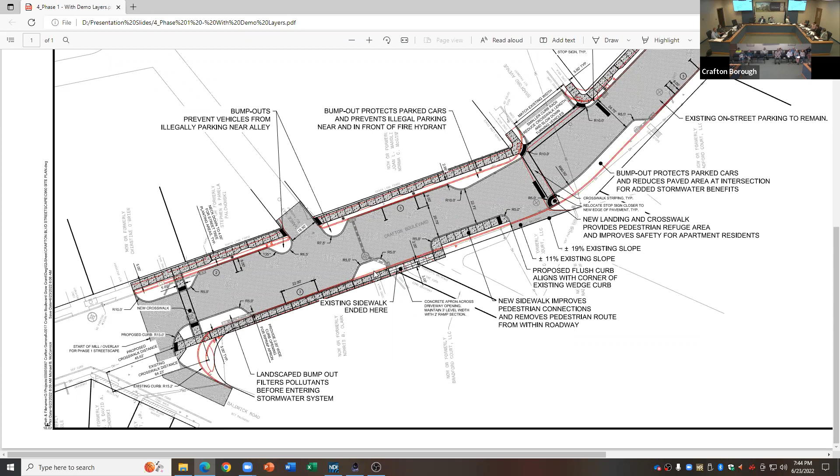Let's go to the bottom left of the drawing, and you'll see that is Baldwick Road, which comes out and intersects with Crafton Boulevard. If you look at the red lines, those are all the existing curbs, so you can see where the curb used to be. You can see that on the drawing as well. Can you zoom in a bit more, right at the intersection of Baldwick and Crafton Boulevard? Let's take a look at a couple things.

Look at the red line versus, if you can scroll, the new curb lines. If you see that thin double line, that represents the curb. You see it's marked proposed curb, R15—that's the new curb. Now look at the crosswalk, look where it says new crosswalk, and look at the distance between the old curbs and the new curbs. There's significantly less walking distance for the pedestrian to cross that street.

Can you show that? I'm looking up on Crafton Boulevard right there. You see that white area—those are the bump outs. In between those two black bars is where a pedestrian would cross. If you look at where the red is, see how far back the red lines are—you had an extended exposure crossing that street. So that's just one safety improvement for every pedestrian walking there. And if you look on Baldwick, it's also reduced its crossing distance by 20 feet.

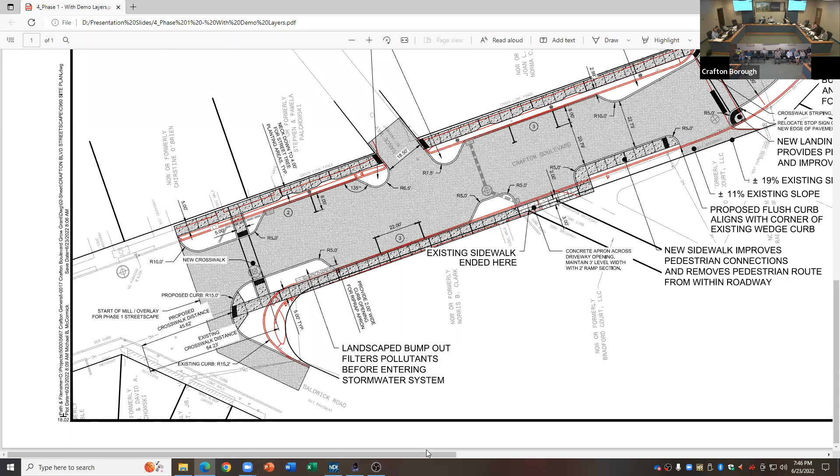We'll get into the turning radiuses in a minute. Next, if you go across the street on Crafton Boulevard, you see the bump outs—they're white right there—and then go west, right across from Baldwick. That's where the fire truck or any vehicle would be turning out, and where these bump outs are is where illegal parking would otherwise be.

So imagine, and when you see the turning radius that will show, if you're coming out driving a truck, whether it's emergency or not, and cars are tightly parked right where those bump outs are, that makes it very difficult to maneuver. And that happens.

We even took a snapshot showing when there were two illegally parked cars in a spot where someone might say, oh, that never happens, people obey the laws here, they won't park at the corner. We're saying that's not true, it will happen. So whether there's a bump out there or a car parked there, the bump out is far superior to the car parked.

Once again, you can't drive over a car with a truck. But on occasion, if the driver misses the swing or doesn't want to back up, he can hump the curb. So we see that as a win for the fire company as well as the pedestrians.

So the rest here is just showing you the red lines, which indicate that the curbs, other than the bump out areas, really haven't changed. The width of the road is essentially the same, except where we squeeze the road for traffic calming, slowing traffic, making safety better for the residents and the pedestrians.

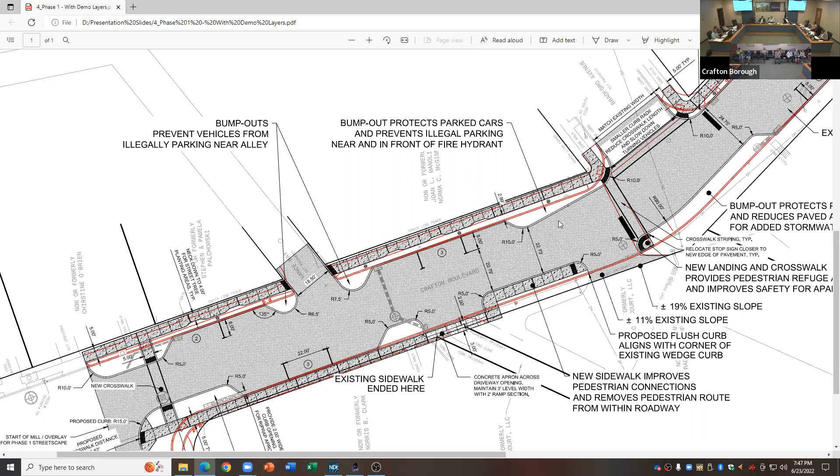So one other thing to look at, the mayor mentioned this. If you go up to the entrance to the apartments you see that marked R5, pointing to that curved radius, the other one there. That is depressed, so when a truck or any large vehicle that doesn't think it can make that turn, it can and probably will run over that depressed curb.

Once again, making it available to turn in. Now you see where the old curb line was, where the red line is. So you might say, wow, there's a huge area that you're taking away for vehicles to turn in. But essentially, as the vehicle moves over, it's over 3 or 4 feet for the sidewalk, but when it turns, it can cut that corner on the sidewalk. So we'll show it in the turning radius maps. It is very maneuverable, in fact almost identical to before the sidewalk was installed.

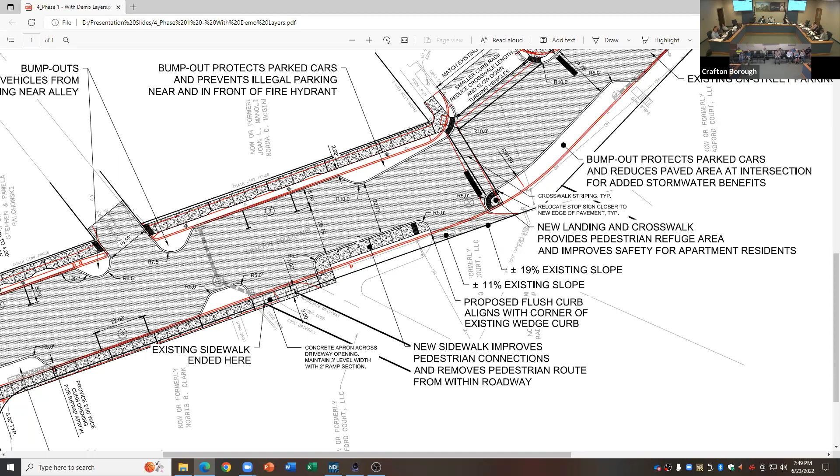So those are some of the features I just wanted to show on the intersection in question, and I wanted to hit some of the highlights. You feel free to take these and look at them. I did want to show you that the red lines indicate there is not an overall reduction in the roadway width.

Pardon me? Yes, good point. So this is the first phase of the streetscape. The next phase runs from Dinsmore to Clearview. Okay, the reason for mentioning that is we took this same design and we moved it into the next phase of streetscape and submitted it to PennDOT.

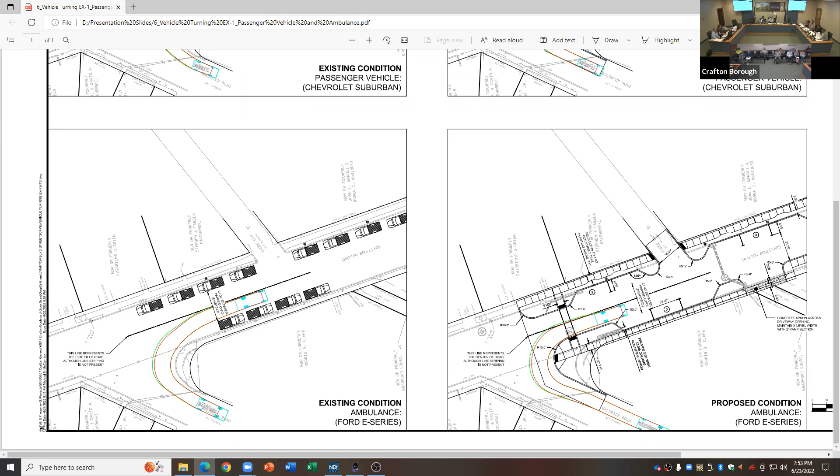Next is the fire truck, and the model was run on a 40-foot fire truck. This is actually a little larger than Crafton's, but it may be similar to the Green Tree truck. So this one's a little different. You can see that the old turn, the front of the vehicle - I'm sorry, I should have said that the green line represents the vehicle body, and the red lines represent the tires. So when you see the green line, that's where the body swings out as the tires are turning.

But in this case, you can see there was a slight entry into the opposing lane for the truck, and now there is a significant entry into the lane for the truck.

But I'd argue that flashers and sirens and trucks and emergency vehicles going through red lights and not obeying the street laws is typical. So once again, this turn would have to be maneuvered expertly by a driver, with the lights, and when it's safe. So this maneuver, we would think, would not happen

in an infinitesimal amount compared to all of the traffic that does pass through here. So if you compare the number of times that the ladder truck will make this maneuver and compare that to the number of times that every other vehicle that uses this road makes that maneuver, it is a massive difference.

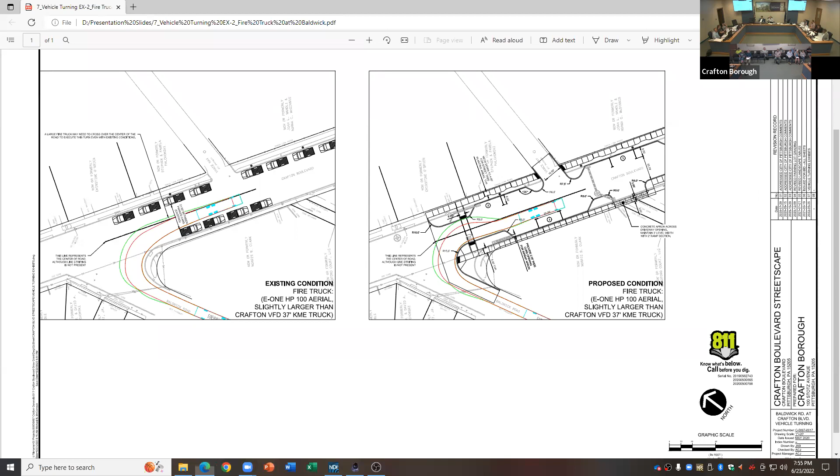So once again, if you look above, you see the red, and this is for the ladder truck. You see the red tires coming in, making the left, and the difference here is as he swings out, we're showing that the tires do not go over the depressed curb. But if they did, that would obviously bring that vehicle in.

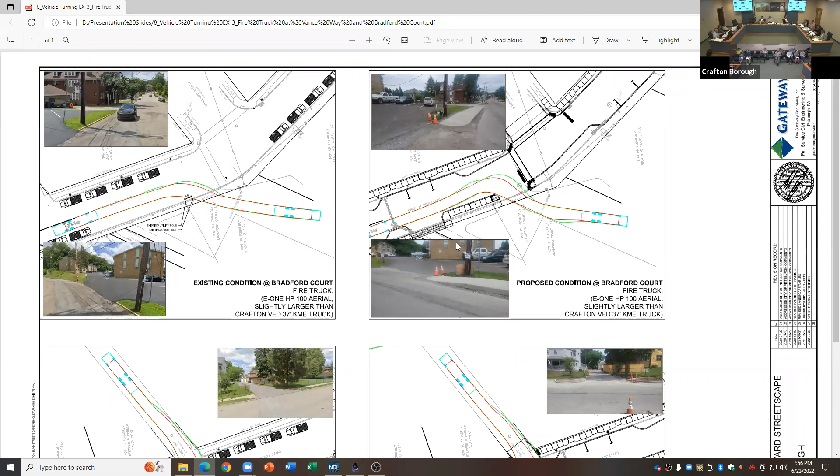So once again, the truck can make the maneuver. And if you look at it, it's the same route. It ends up in the same place. It just does make a wider turn to get into that facility.

Next is Vance Way. We heard some questions about Vance Way. Just wanted to show that a truck, once again, before and after - nothing's really changed at Vance Way.

Those two bump outs really don't have an impact associated with the turn, whether there's a car there or a curb there and the driver doesn't make it on the first round. Maybe they don't drive these trucks that often, and sometimes folks are rusty. If they don't make it and they hop the curb, I know that's not the best scenario, but if they drive it expertly, they'll make the turn. If they're a little off, they'll hop the curb. If there's a car parked there, they're backing up. So the curb, once again, those bump outs, from a safety standpoint, they get people out on Vance. They get you squared with the intersection and a safer exit onto the road.

Also, there is an added protection to the parking. Even something simple as someone on their phone, not paying attention, veering over, they're going to hit that curb and hopefully bounce off and not hit the parked vehicles. If there's a parked vehicle there, they're going to hit the vehicle, push it into the one in front of it, et cetera. So even with snow and sliding, there's some protection for the parked cars as a result of these bump outs too.

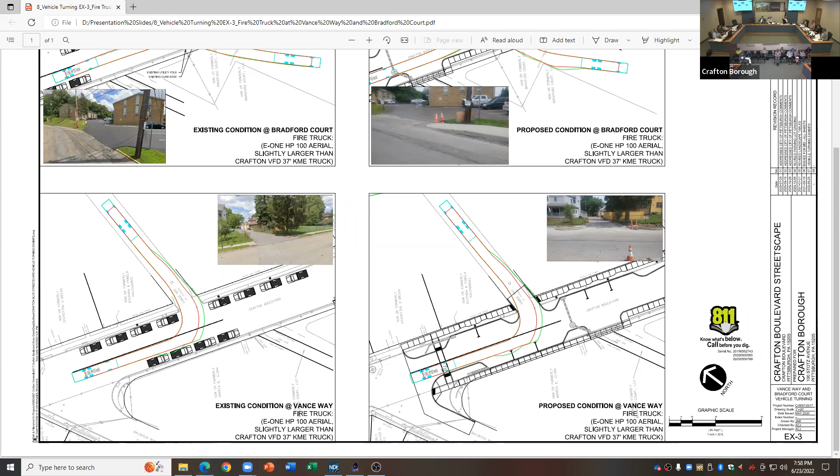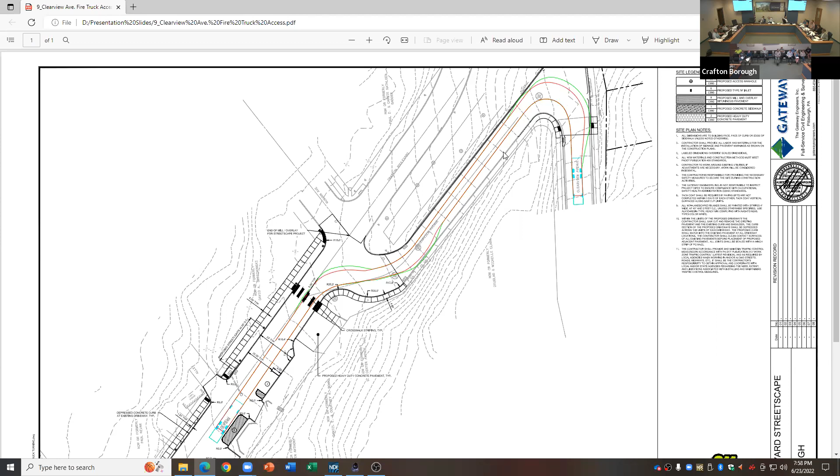Okay, so I said going into Clearview Avenue, you can see how the fire truck, the ladder truck, would make the turn, the red and the green again. So it's an easy maneuver to get up there. If you look above and see how it wraps around onto Clearview Avenue, that turn is a little tougher, but that's makeable too.

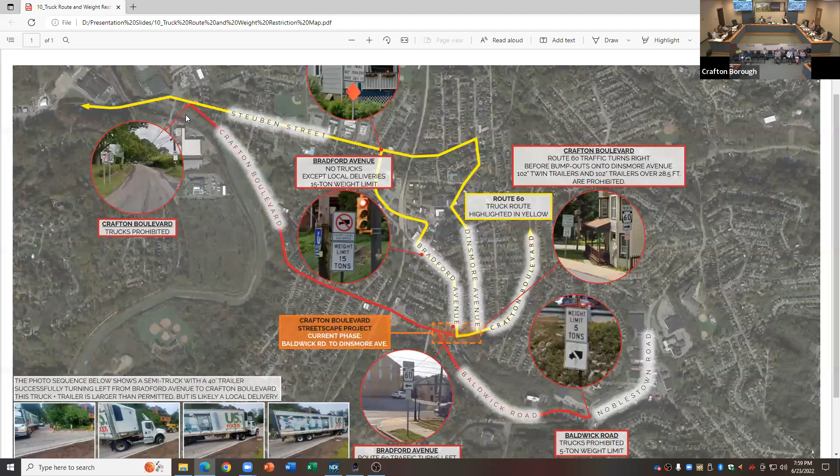One other thing we wanted to mention is that since Baldwick seems to be the biggest area of concern, this is a little busy. But if you look in the center in the orange square, it says Crafton Boulevard Streetscape Project, Baldwick to Dinsmore. So if you go down Baldwick, or point to that weight limit down at the hot dog shop, there's a sign for a weight limit of 5 tons, which means 5 tons is basically a passenger vehicle, a truck. Now there are local deliveries and folks that sneak through anyway, but we've shown that the turning radiuses can be made. My point is that coming up Baldwick, or from the bridge, the big bridge down Crafton Boulevard, those are all 5-ton limits.

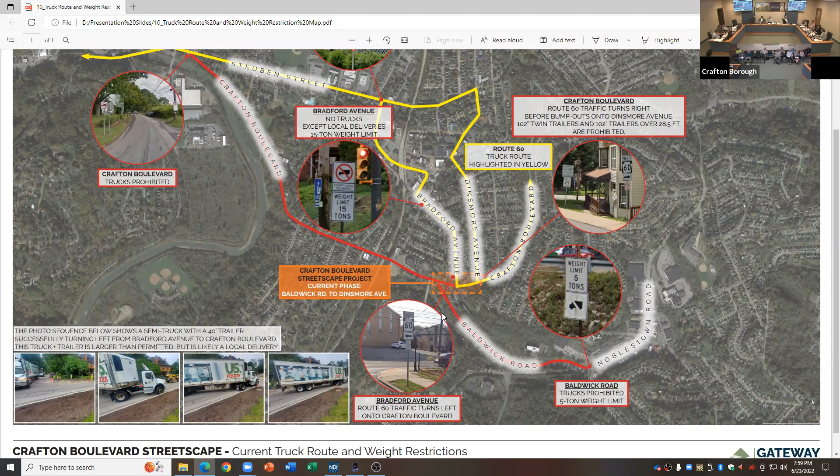So once again, the larger vehicles are limited here. This is not a busy intersection for tractor trailers, and I'm not saying they don't show up and disobey the law. I'm only saying that if they do, they can make the turns, or take the gamble they chose when they went there. There's a couple pictures here at the bottom, where Bradford comes up and turns. You can see this is an 18-wheeler with a tractor illegally coming through there, but he did make the turn. So once again, just to show that these roads are still maneuverable.

However, just getting folks to pay more attention.

So just wanted you to take a look at the positive side of this. The projects we've been involved in with streetscapes, people are very excited, they celebrate these. I know that Crafton is excited too, and there's maybe a little trepidation related to the changes. They look scary, but what we're trying to show is that it's accepted practice. It's already here in Pittsburgh, it's being utilized. If it didn't work, you'd hear complaints, problems, outcries and backlashes for these sorts of things. In the places I mentioned that are busier and even smaller areas, they work. So just trying to get that point across. Aside from us saying, as professionals, this will work, it's really nice too.

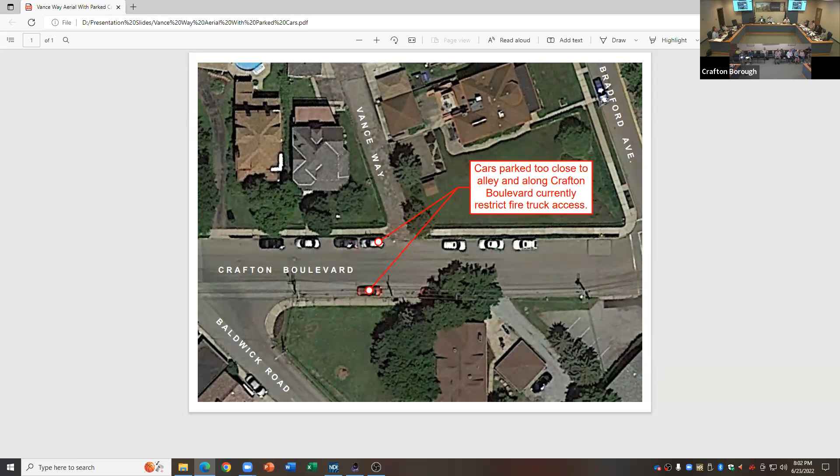So if a fire truck had to maneuver that, he can't really swing in to the right because the red car's there and the white car's cutting him off from getting too close to that corner. So it does happen, and what we're putting in, although we don't have a bump out in the red car, the white car is simulating a bump out. The point was that it does happen, that folks do park where they shouldn't park. So that is it.

So sorry that it took a little longer than most hoped, but I wanted to spend some time to hopefully get everybody on the same page and understand where we come from as professionals, and that we don't take this lightly. We do this for a living. We're very proud of what we've presented to you, and really are excited that you continue with this process to beautify and make your area safer.

Thank you, Rick. The process that we'll go through for this is that we're going to take public comments now. So I'll go through the rules for public comments. You'll be able to speak then. For the ones associated with this project, we'll have the engineer be able to respond to those at that point. Later on in the agenda, we're going to go through the Community and Infrastructure Committee. We're going to have council discussion regarding this item too, in case council has questions or any concerns, those can be discussed at this time. So after the Gateway responds, if there's any other folks that would like to speak about anything else on the agenda, we'll allow them to go through that. Then at the end of the meeting, we'll take public comments for anything else that's not on the agenda.

So I'll read this. It's public comments on agenda items. At this time, citizens may address the Crafton Borough Council on any issue appearing on today's agenda. Only residents and taxpayers of the Borough of Crafton will be permitted to address the council. Comments on non-agenda items will be taken at the end of tonight's meeting. Speakers will be permitted to speak for a maximum of 3 minutes. Groups of people will be required to designate a spokesperson to represent them before council and may speak for a maximum of 5 minutes. Please sign in and or raise your hand on Zoom and state your name and physical address for the record.

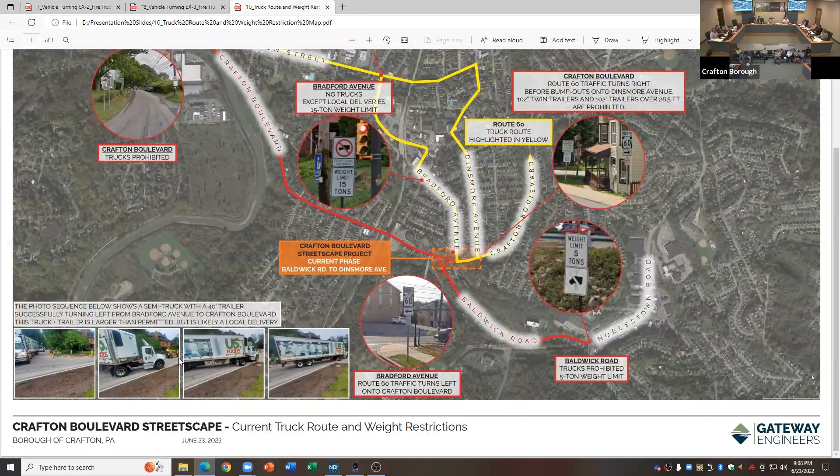So, yeah, we've had the chance to get all the questions, and the responses may or may not be what you wanted to hear from the engineers. When we go through the infrastructure committee, council will discuss everything we've heard, and if decisions need to be made, council will do that. I want to recognize all the residents and their comments, because this is what we want — we want to hear from you and have this information if you have problems. That's why we're here, we're here to serve you. Thank you so much for such thought-out comments.

If anybody online has any other comments they'd like to make about agenda items, they can do so now by raising their hand. There was nobody signed in for anything else. Okay, we have none.

We're going to acknowledge receipt of the written report. On the OneDrive for May 2022, the financial statement, treasurer's, police, EMS, code enforcement, and building inspection reports were all uploaded. Did any council members have any questions or comments?

The president's report: the only thing I have is that we've done an RFP for the strategy session. As we look to the future, this will be a meeting the public would attend, where we'd have a strategy session talking about our future — what do we want to do from a Crafton standpoint. We'll have a facilitator to help with that, and we have an RFP out, due July 14th, for anyone who wants to come forward and be a facilitator for this session.

The mayor's report: the one thing I'd crystallize, after listening to our fire chief, is to underscore his ask that we consider the three items — making a change at Bradford Court, a change at Vance Alley, and Clearview — and I'd ask that council approve for Gateway to look into those items and come back to us. Thank you.